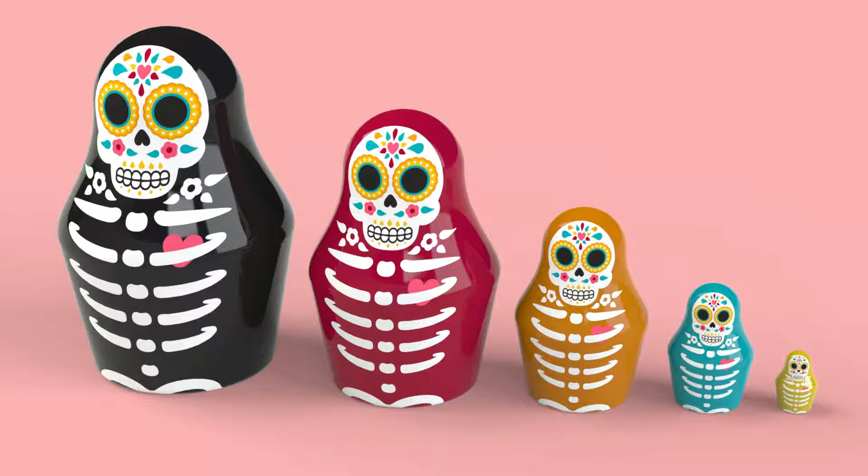Hi and welcome to this tutorial to create sugar skull themed nesting dolls. In this tutorial I will demonstrate the use of the scale tool and shell. The decal used in this tutorial is available to download from the blog.

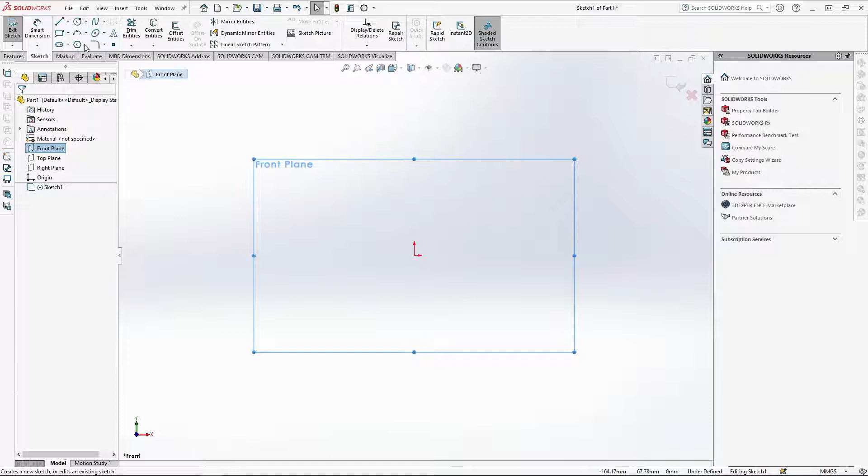To begin, start a new part. Sketch onto the front plane, view from the front. We're going to start with the largest doll. Select the centre line, draw a line up from the axis by 195mm. Then take the circle and starting on the line towards the top, draw the circle up to the end point of the line. Take smart dimensions and make the circle 80mm in diameter, and then ensure that the line is

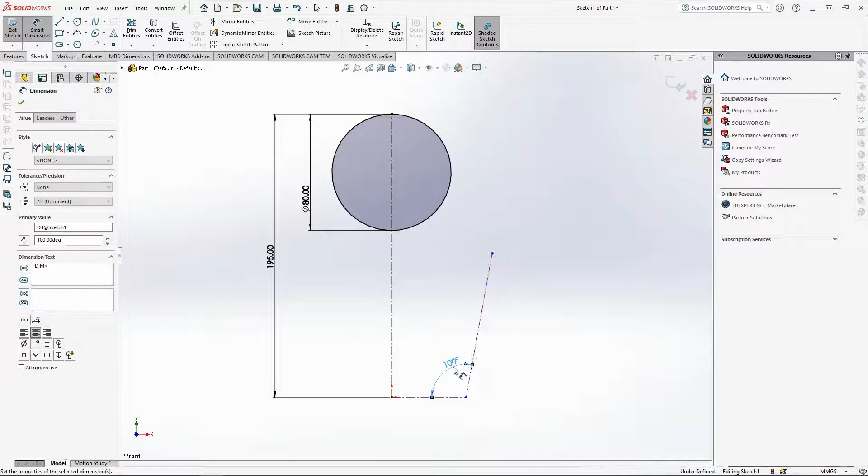195. Use the centre line again and draw a 50mm line along the bottom from the axis. Then go up diagonally like this. Take smart dimensions again, make the angle of the line 100 degrees. The height of the line should be 80mm. Select Sketch Fillet here and change the dimension to 5. Fillet this corner and OK it.

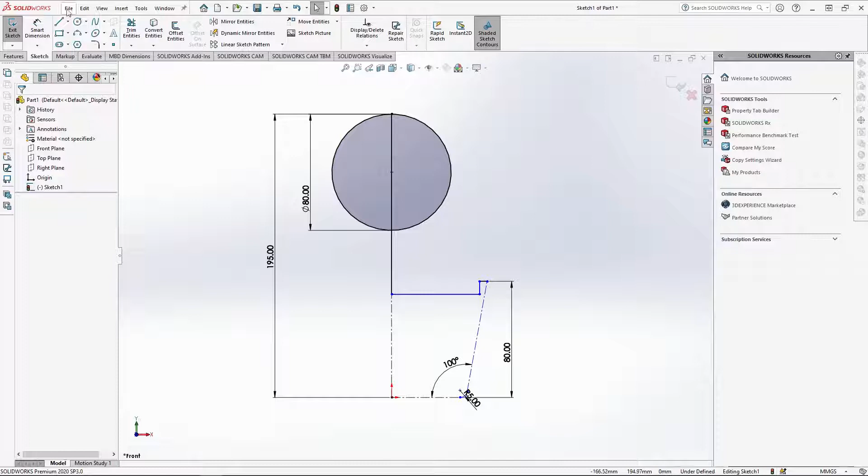Next, use the line and going from here, go inwards by 5mm and down by 9. Draw it up to the centre line, then trace along the centre line up to the top point. Use trim entities to cut away the other side of the circle. Then use the spline tool to join up the circle's side point to this point.

To manipulate the spline, select the point so that your spline handles appear like this. Selecting the end point of your spline here, you can drag your spline into position. To input the exact position, change the tangent radial direction to -102 degrees. For the other spline handle, change this to -90 degrees.

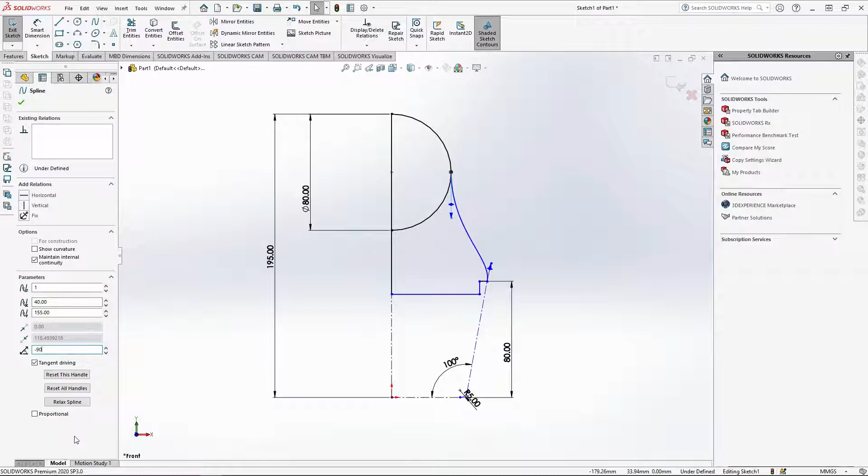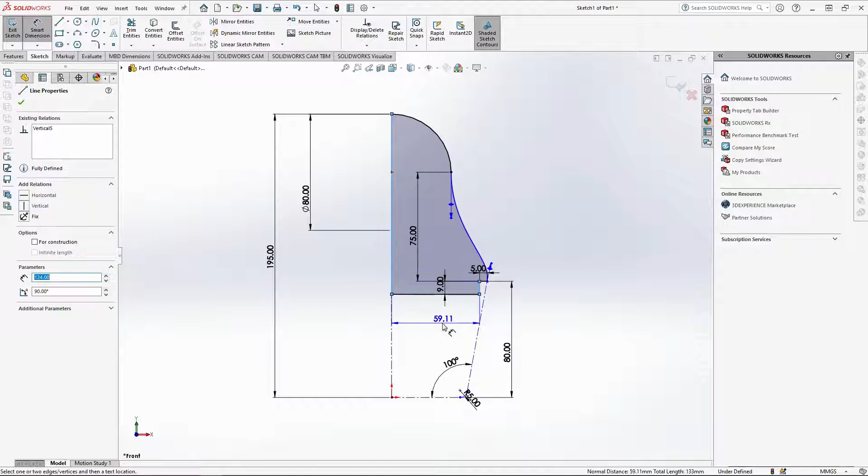With that in place, use trim entities again and trim away the inner edge of the circle here to create a closed profile. Add some smart dimensions to the doll's lid edge. This again is 9mm. The top edge is 5mm, but this will be changed for each of the scaled down dolls. The height of the spline should be 75mm. Finally, you can add this dimension to fully define the sketch. However, this is not really necessary as we'll need to delete this every time we change the lid edge dimension.

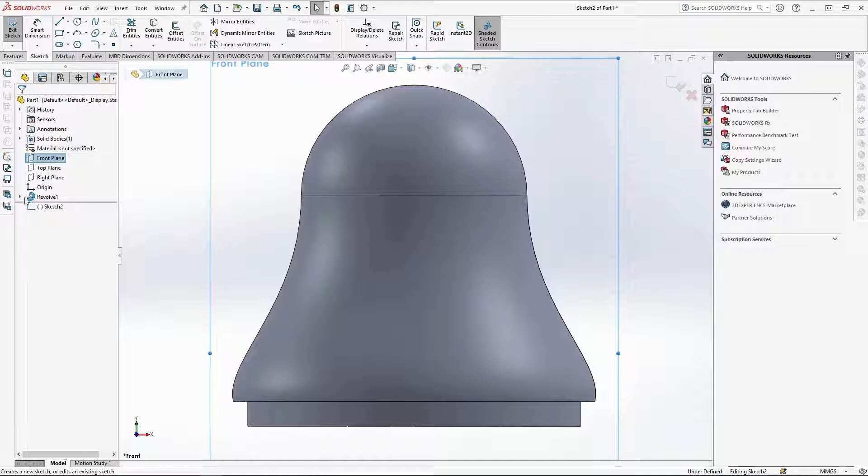We can now revolve the sketch and select this edge for the revolve axis and OK the feature. This gives us the lid part of the doll. For the bottom, start a new sketch onto the front plane. Make the previous sketch visible. You'll find this in the revolve drop down. You can then just hold Control on your keyboard and select all of these entities. Then select Convert Entities. Close off the profile with the line like this.

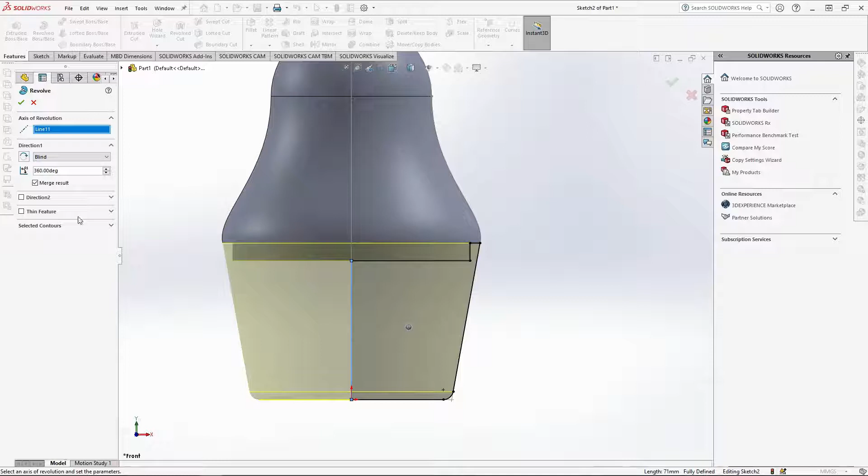I can then revolve the bottom part of the doll from this edge. This time, make sure you untick the Merge Result box so that the parts are separate bodies. Hide the revolve sketch before saving. Save the part as Doll 1. We can now begin scaling down the part to create 4 other dolls. I'm scaling down the doll before I shell it. Otherwise, the shell feature will also scale down, and the dolls will become thinner and thinner.

Select Scale, and when the options open, select both of the doll bodies. You will see the selections under Scale Parameters. Under Scale About, drop down the menu and change this to Origin. This keeps both bodies together, and they scale down as a whole. For doll 2, we need to scale down to 0.8. OK the feature, and you will see the part shrink down.

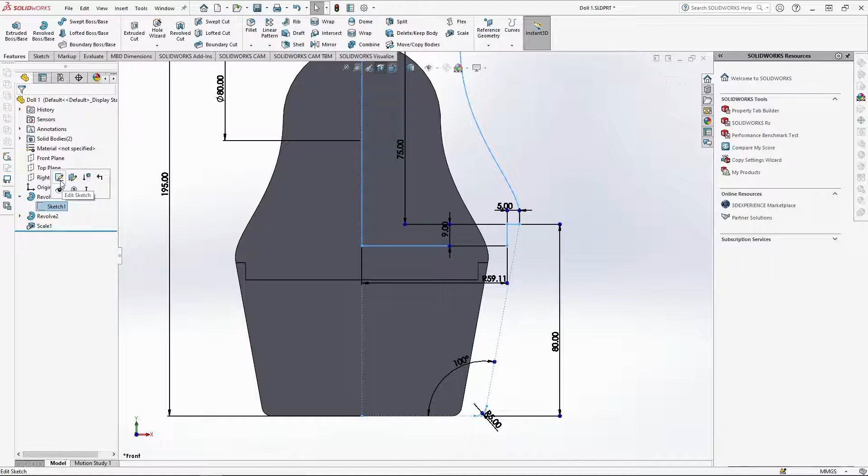Turn on section view here and OK it. Here you can see that the lid lip is quite small. So to edit this, go to the first revolve sketch here, right click and edit sketch. We need to change this dimension, but we'll need to delete this dimension first. Double click and select the 5mm dimension. Change this to 6mm. You can then re-add this dimension here and close the sketch.

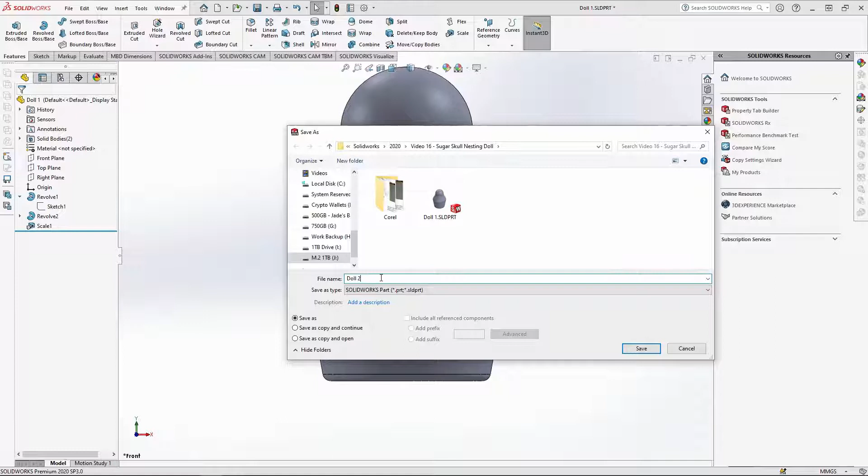Turn off section view and go to File and Save As. Do not save over Doll 1. Rename the file as Doll 2 and save it. For Doll 3, keep Doll 2 open and edit the scale feature with a right click. Change the scale here to 0.55 and OK it.

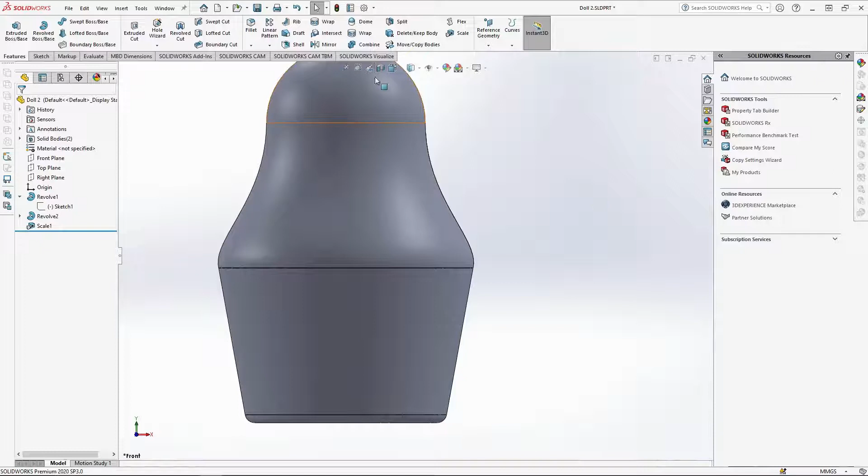Like with Doll 2, we need to make the lid edge a little larger again, so edit the revolve sketch, delete the smart dimension and change the lip dimension here to 8mm. And OK the sketch. Turning on section view, you will need to ensure that there is space between these points, otherwise it'll cause issues when you go to shell the parts later.

Turn off section view and use Save As. Save this part as Doll 3. Next is Doll 4. Edit the scale feature and input 0.35 for the scale and OK it. Edit the revolve sketch again.

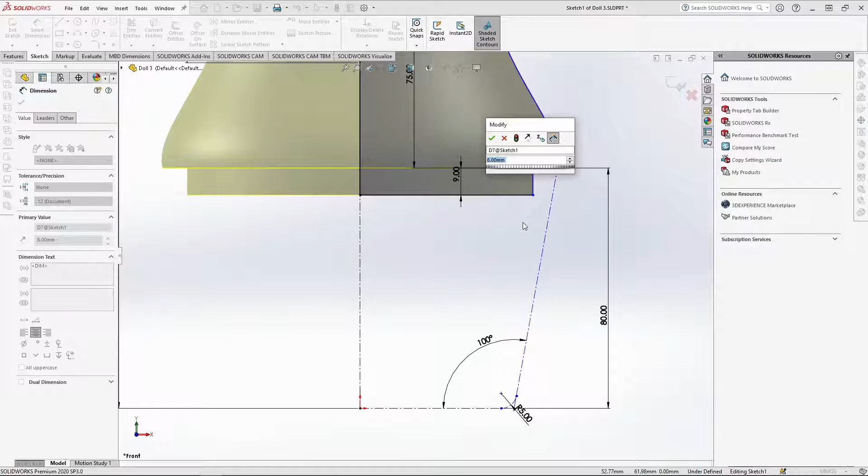I forgot to add the bottom dimension on the last doll, so I can just change the lid edge here to 11mm. I'm going to add the smart dimension here again and close the amended sketch. I already know that the lid dimensions are okay, so I'm going to Save As and save this part as Doll 4.

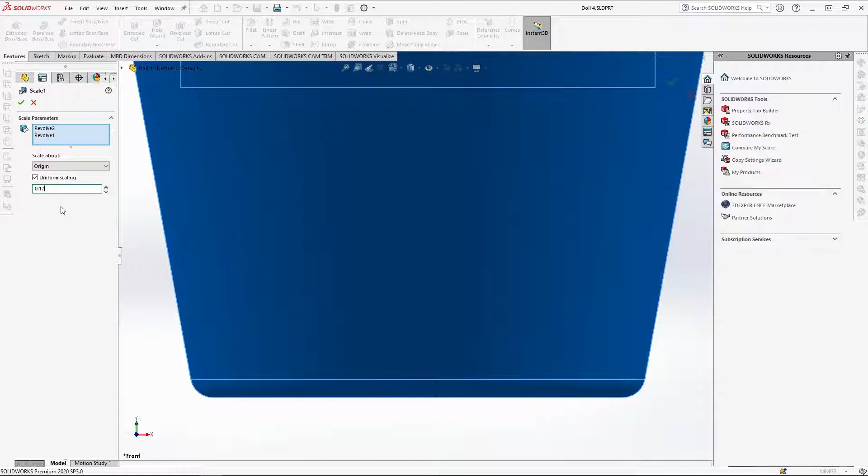For Doll 5, edit the scale feature and change this to 0.17. This will be the smallest doll. Now I'm not going to have this as 2 parts, as the last nesting doll is usually so small that it is a solid piece.

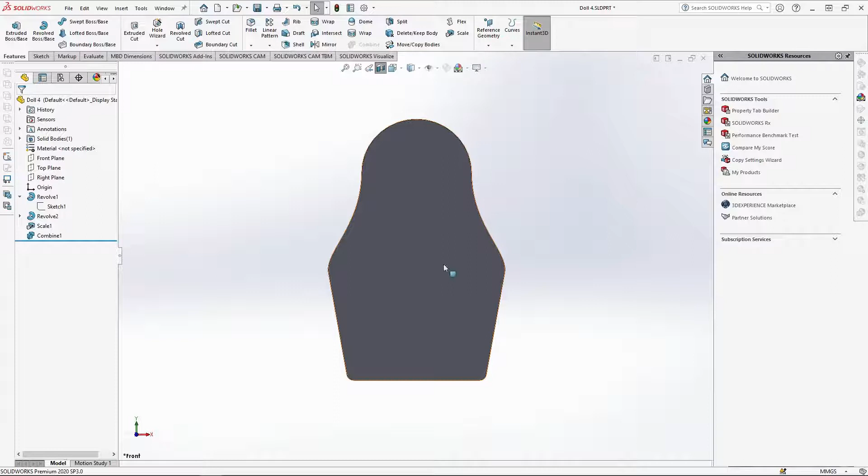So I'm going to use the Combine tool, with Operation type on Add, select both doll bodies, and combine them into one piece. So now when I turn on section view, you'll see the piece is solid. Use Save As and save the part as Doll 5. Keeping Doll 5 open, open the other 4 doll parts.

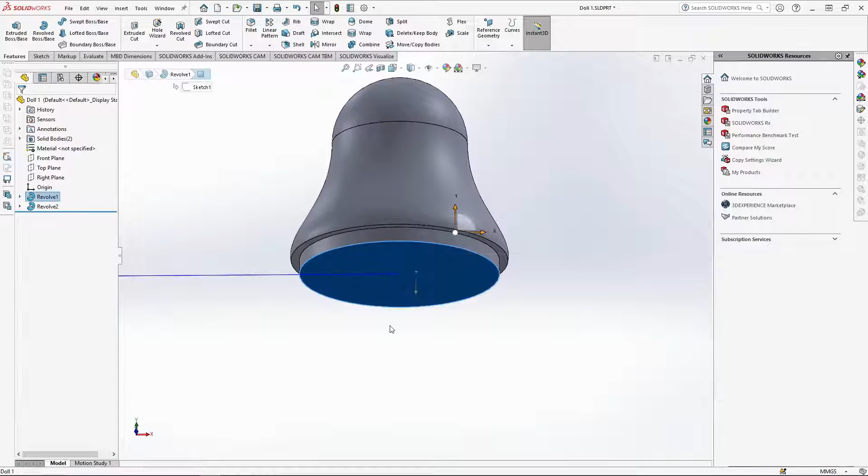Going to Doll 1, I'm going to shell both bodies from the inside. Start by right-clicking and hiding the base so that you can see the inner face of the top body. Select the face and then the shell feature. Change the shell dimension to 3mm and OK it. That has hollowed out the doll's lid to a 3mm thickness.

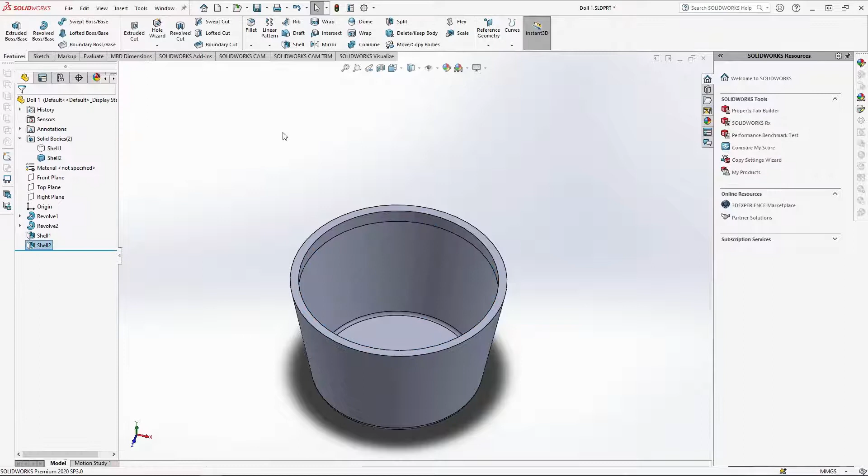Under the solid bodies drop down, bring the bottom body back into view and hide the top. Now select the top face of the part here and use shell again, keeping the dimension at 3mm. Bring the top part back into view, view from the front, and select section view to see inside of the doll with the shell applied. Turn off section view, ready to add appearances.

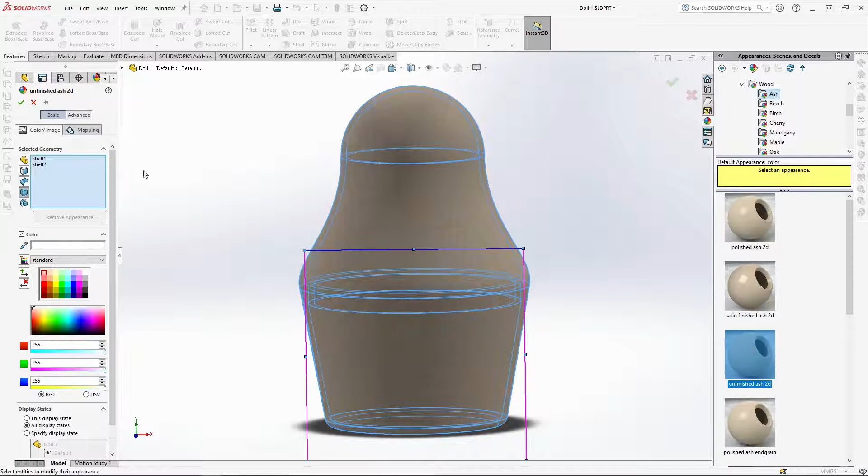Select both bodies under solid bodies, select the appearances icon, and add an unfinished ash appearance. I'm changing the mapping of the appearance to cylindrical like this and okaying it. To add the painted surface of the doll, select all the outer faces of the doll, go to Edit Appearance and select Painted, then Car. For Doll 1, I'm choosing black as the background for the decal.

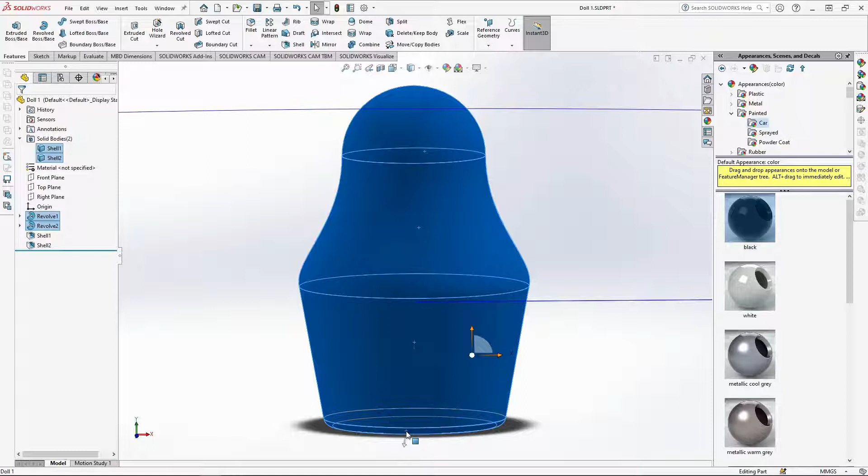Apply the appearance. For the decal, select all the outer faces of the doll apart from the bottom. View the part from the front and this time select the decal icon here. Browse for the Sugar Skull decal PNG file and open it. This decal is available to download from the SolidWorks blog. The reason I'm using a PNG file is so that the background of my image is transparent and I can put it over any appearance without a background or mask getting in the way.

When it opens, you'll get a decal preview. Under Mask Image, you will need to change this to use Decal Image Alpha Channel. You can't tell that this decal has a mask background right now because my appearance is black, but you'll be able to tell with the other doll colours.

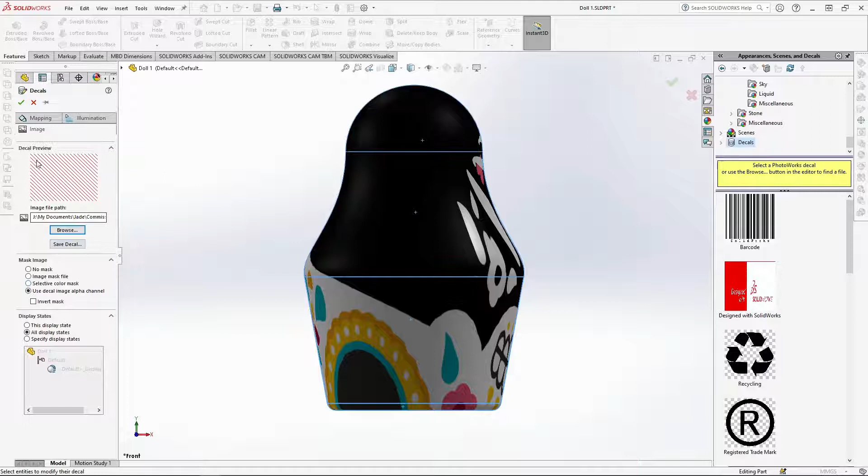To map the decal into place, select Mapping and change the mapping type here to Projection. Change the direction of projection to Current View. Again, ensure that you are viewing the part from the front view. We need to resize the decal. With fixed aspect ratio ticked, change the height of the decal to 195mm. I can now just drag the decal into place, ensuring it's centred to the model.

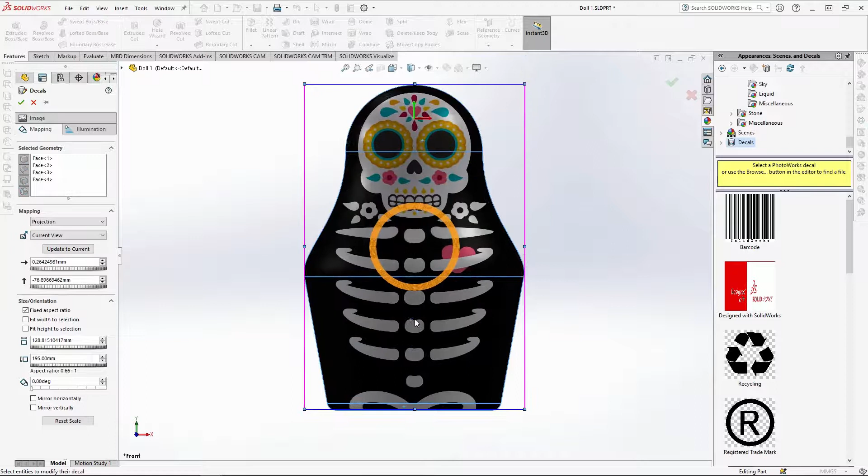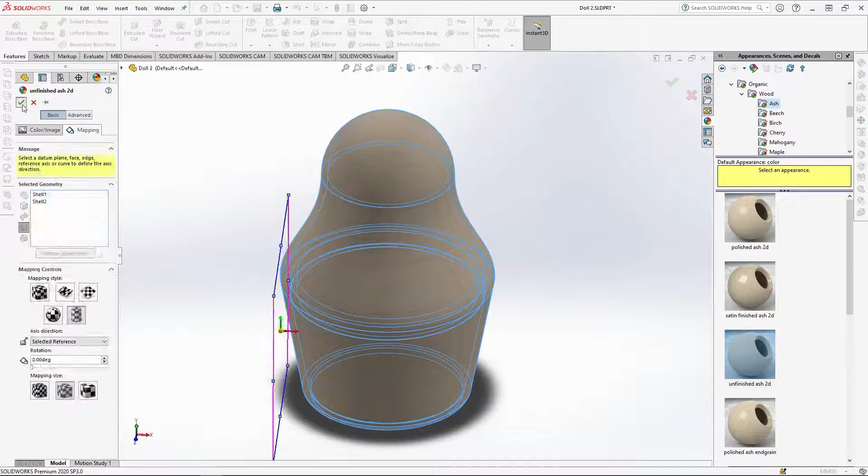OK the decal, resave the doll and close the part. Go to doll 2. Like doll 1, shell both parts of the doll by 3mm. Apply the unfinished ash appearance to both bodies. This time, for the paint colour, make this doll a darker pink like this.

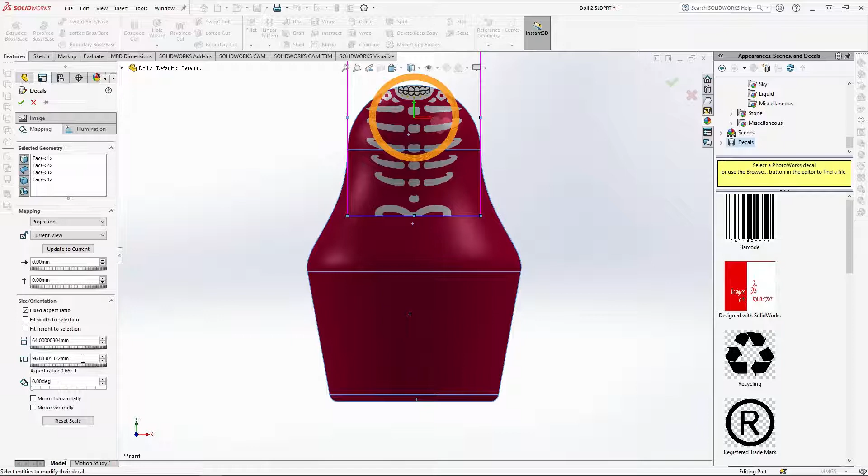Add the same decal again. This time, when you change the mask to use Decal Image Alpha Channel, you will see the mask background disappear. Change the mapping to projection again with Current View on. This time, you'll need to resize the decal a little smaller. Make this height 96.88mm. Drag the decal into place and OK it. Save the part and close it.

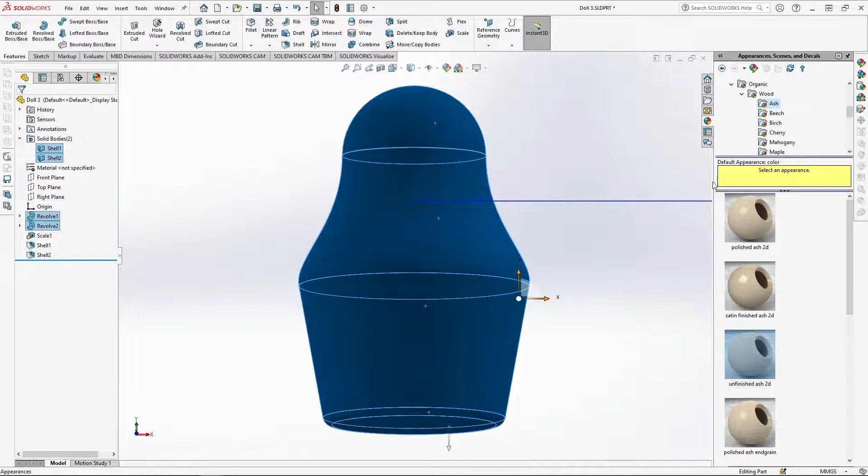Next, move on to doll 3. Shell both parts by 3mm each. Apply the unfinished ash appearance to both bodies. Select the faces again for the painted part of the doll. For this doll, I'm choosing a shade of orange. Select the 4 faces for the decal and add the same decal.

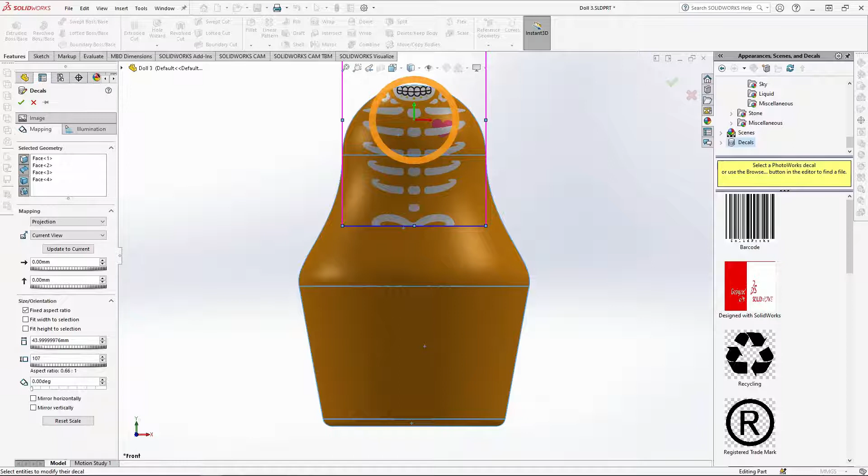Remember to change the mask type. You should see the masked background disappear. Mapping should be on projection with Current View. The decal is smaller still. For this doll, make the height 107.25mm. Drag the decal into place and OK it. You can see if you rotate your doll that the decal projects onto both sides of the doll like this. Save the part and close it.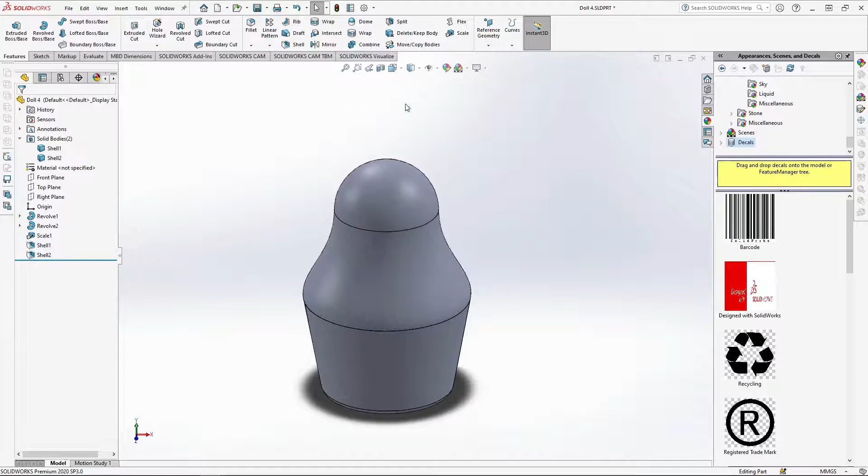For doll 4, repeat the process and shell both sides by 3mm each. Add the unfinished ash appearance. Remember to change mapping to cylindrical. For the paint colour of this doll, I'm using this teal colour. Add the decal to the 4 front faces of the doll.

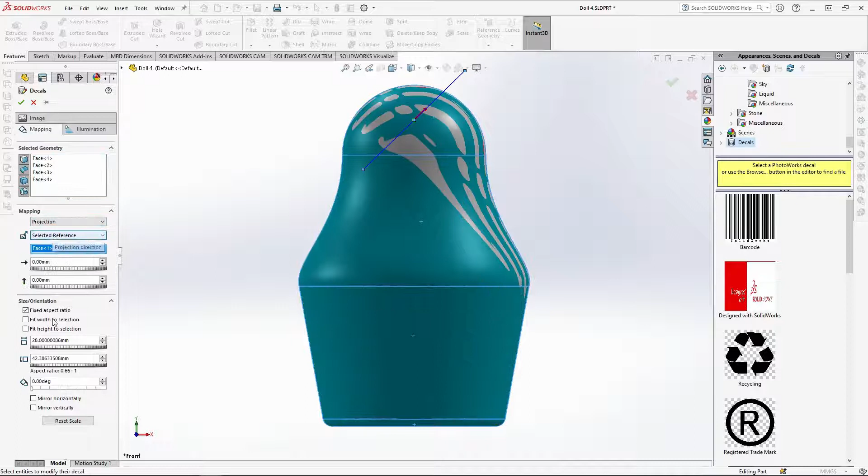Change the mask type again, ensure that the mask background disappears. Then use projection mapping and switch to current view. The decal for this doll should be 68.25mm in height. Drag the decal into place and OK it. Save the part and close it.

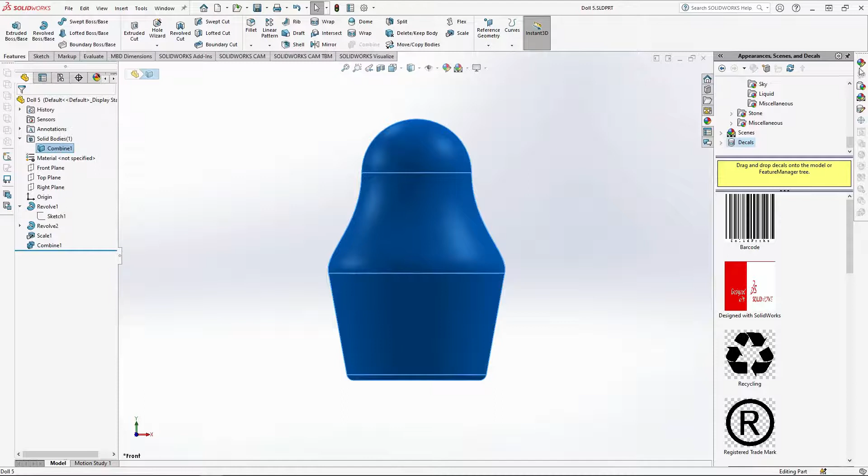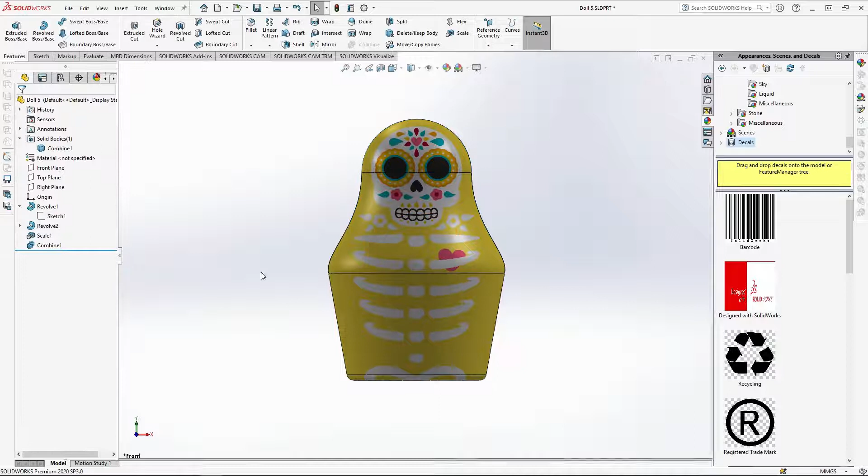Finally, doll 5. For this doll, no shelling is required as it is a solid piece. You also don't need to add any ash appearance. You can simply add the car paint to the part. I'm making this doll a yellow. Add the decal in the same way as the others. For the height of the decal, change this to 33.15mm. Move the decal into position like this. Resave the part and close it.

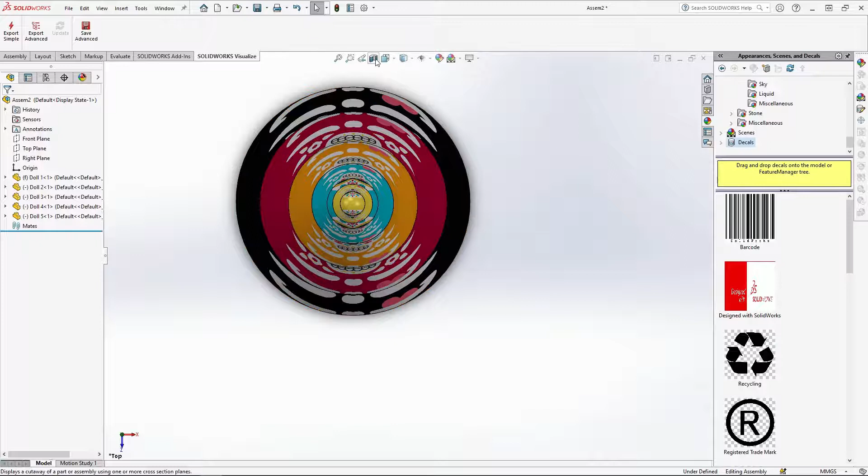Now to assemble the dolls into each other, start a new assembly and open all 5 dolls. Viewing from the top, drop in doll 1. Then drop in each of the other 4 dolls in order, centred to each other like this. Once they're all in, turn on section view. Drag the section plane up to the centre of the dolls and then flip the direction of the section view here so that it's viewing from the front. OK the section view. This will make it easier to mate the dolls into position.

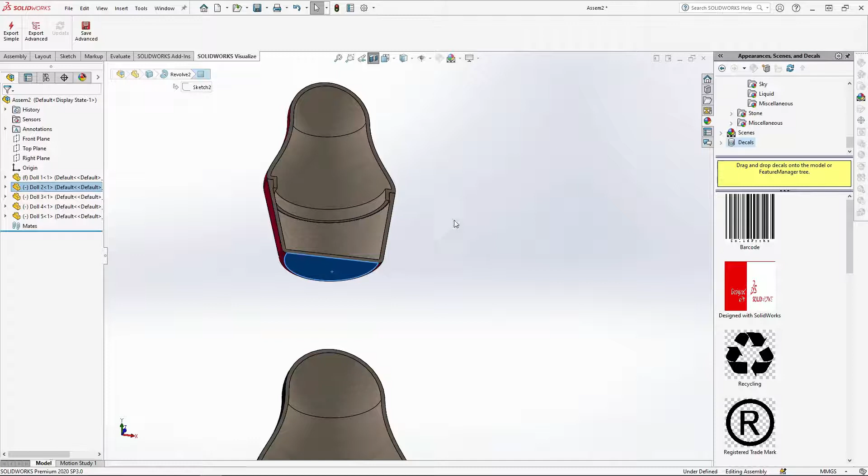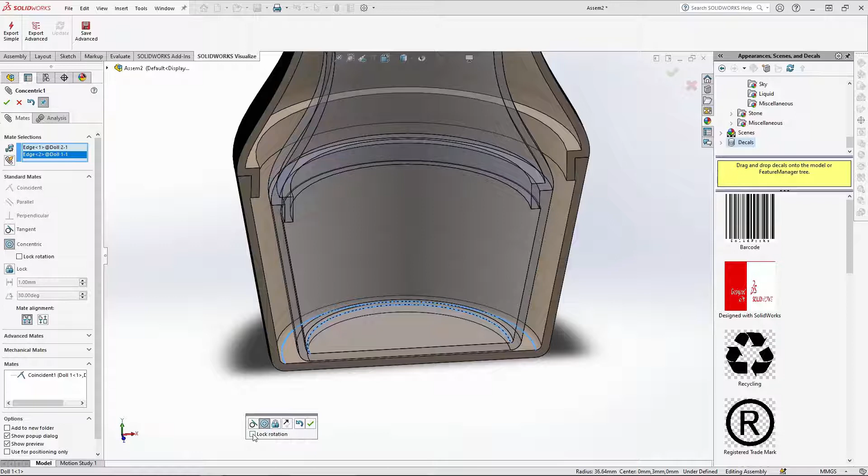Start by selecting the bottom face of the second doll, then select the mate icon to the inner bottom face of the first doll. It should automatically mate coincident. Tick the green tick to apply it. Then to centre it into the doll, mate one of the circular edges of doll 2 to the circular edge of doll 1 like this. It will make concentric and become centred, but you must also tick lock rotation. Repeat the process for the other 3 dolls so that they sit within each other. Go from the biggest to smallest.

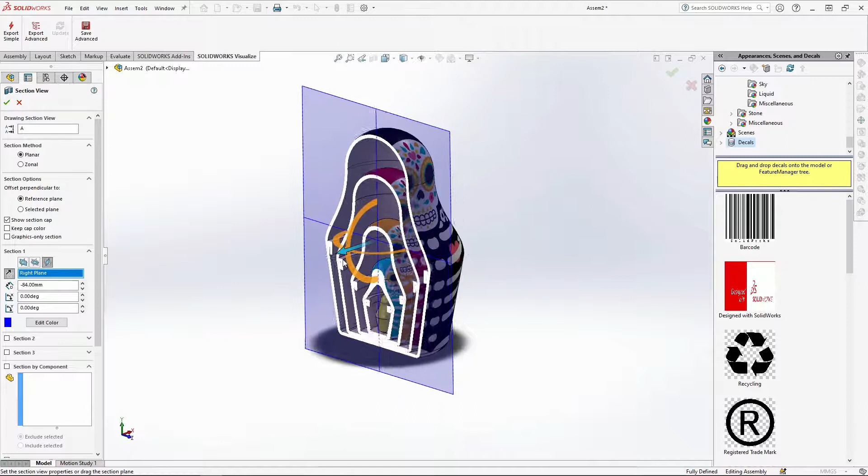Once they're all mated into place, turn off section view. Then select it again and change the section view to use the right plane. As I drag through the model like this, you can see each doll inside each other. With the assembly finished, you can save it.

I created this animation of the nesting dolls by using save bodies in the documents and saving the top and bottom of each doll as individual parts. I then had to re-add the decals to each part. I created an assembly with all of the parts again and created an exploded view. The exploded view was added to an animation which can be exported to Solidworks Visualize. I hope you enjoyed this tutorial.